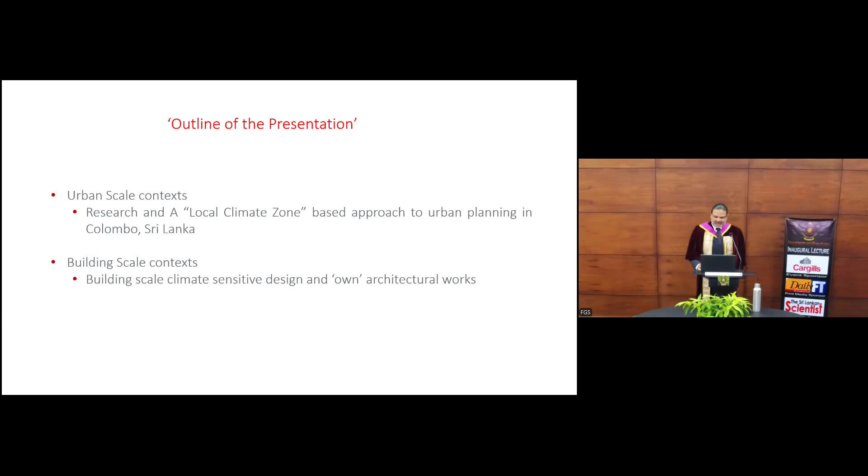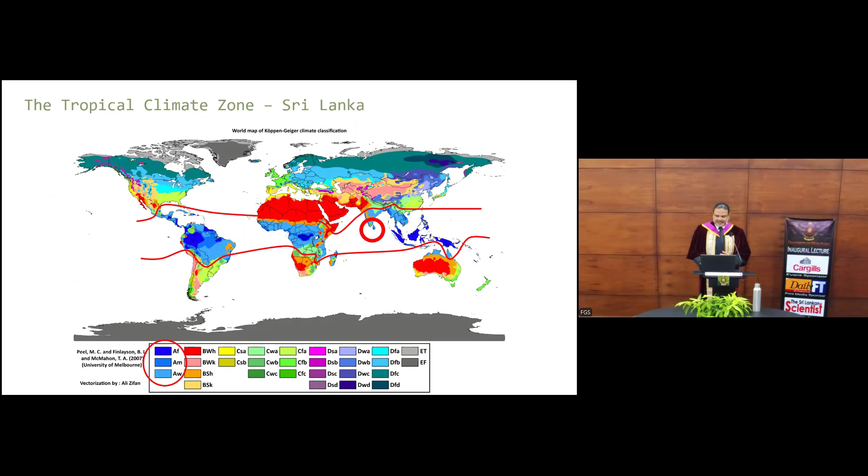Climatic context: we know that we are in the tropics, and Sri Lanka, very especially, is in a unique situation being almost on the equator. There are situations where the tropical climate we experience is varied throughout our country. This is both a challenge as well as an advantage.

We know that designing in the tropics, or living in the tropics, and therefore design for habitability, has many challenges, some of which are alluded to here. High humidity makes evaporative heat loss very difficult. It's a principal means of thermoregulation at higher temperatures, which allows us to be comfortable in this context.

Weak macro level winds: although most of design is based on natural ventilation in this area, at certain parts of the year we are devoid of it. We know that wind directions change, and also when the sun is directly overhead, we see periods of no wind, which makes design difficult.

Another thing is absence of annual variations. We almost don't feel any seasons as such—maybe rain and more rain—but having these aspects are challenges.

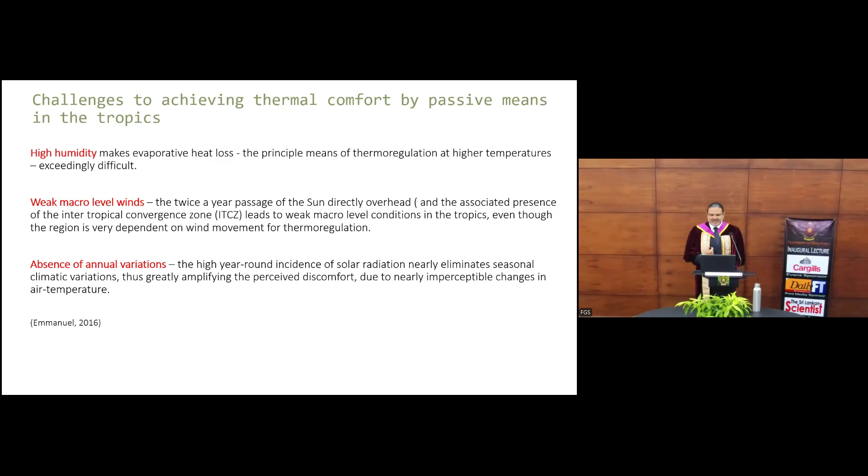Further, local and global challenges, especially in this context. Now we see things getting increasingly problematic, where extreme events are not readily known before they happen. Therefore, these consequences can be tragic.

One of the aspects we can pinpoint is the urban heat island effect, and this is where my studies as well as teaching focus on—urban heat island as a way to mitigate and adapt.

When we talk about achieving conducive environments for living in the urban outdoors, we look at trying to break from the vicious cycle where energy use puts back or exacerbates the system totally. So in decoupling conventional resource use and therefore waste, we can mitigate and adapt.

In this sense, we have to look at all contexts, from the urban scale right to the building scale. But on the urban scale, or context where people would build, has more importance in this area that I have taken on. Therefore, settlement planning is part of the major element that we focus on.

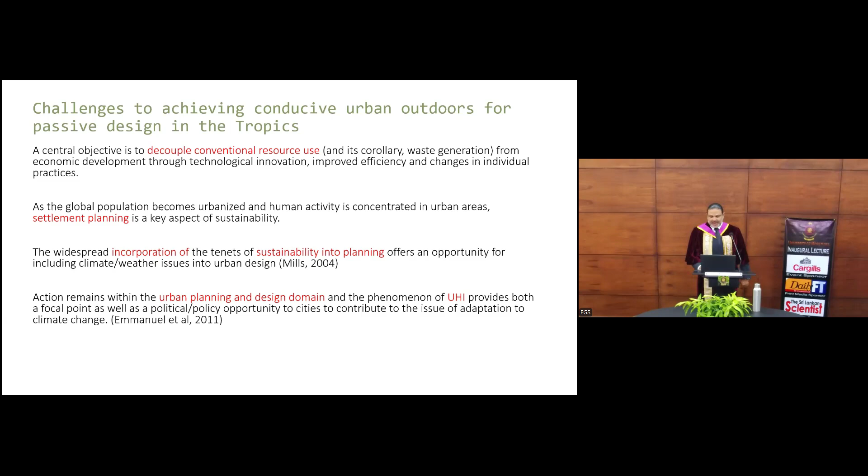The tenets of sustainability into planning is also a critical area that is forgotten most of the time. But here we focus and say that urban planning should be in the design domain, and the approaches to UHI mitigation is a major part of that—urban context.

As mentioned, there are several scales that we dwell upon in terms of design. When we talk about climate sensitive design, it can take on from the mesoscale right down to the micro scale. In my studies and in the applications that we take on, it is the micro scale that we are interested in—that is the scale that a practitioner, urban designer, or architect can focus upon.

Therefore, a three-dimensional space at the micro scale also allows us to design for natural light and ventilation, which is very much a part of our planning and building regulations.

In this purview, the local climate zone is a system that includes climate critical urban parameters. That is, not only do we talk about morphology or physical factors, but the idea that climate also should be built into it is an approach that could allow better application. It is this area that I will stress upon.

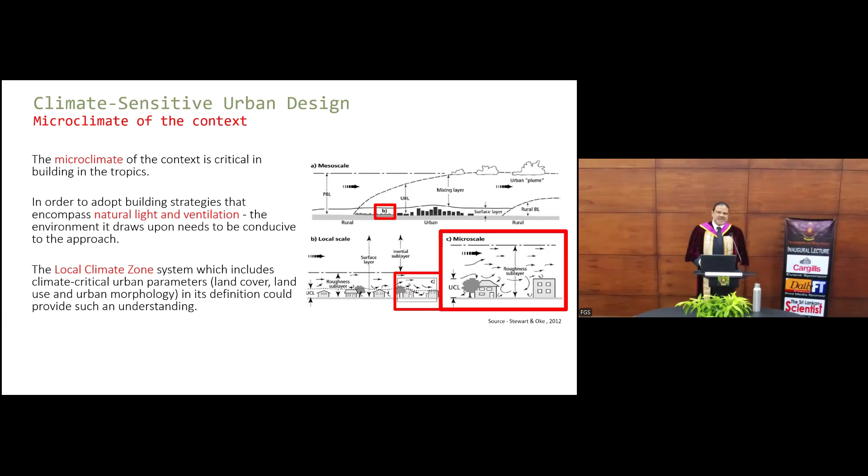So the local climate zone classification is a development that has really taken on since we started these studies almost a decade ago.

Urban heat island investigators saw several problems with the term urban heat island, where a simple definition of urban areas being warmer, or cooling slower, than rural areas was deemed too simplistic. Here, the idea is that the protocol should be more specific so that we can draw upon this.

So when we go into local climate zones, it means the areas that we occupy. We know in general areas, even though we are moving through a city, certain parts of a city feel different. You feel the difference in your local warming. But in definition, it was urban.

So this is where the local climate zone comes in. Local as in a region of uniform surface air temperature, which is 100 square meters to a square kilometer, a local zone, so that it can be taken on later, which we will discuss. Climate, so it's within a certain zone, we would experience a certain climate. The climate is a characteristic parameter that we would feel over a certain amount of time.

And then zones. So in zoning these areas and recognizing that each zone is different, we go away from the urban to rural difference and talk about the urban heat island intensity between certain zones. So this diagram on the right shows you these patterns that were developed. We know that when we are moving through a high density, high compact, high rise area to a more open, low rise zone, we feel different. So this is exactly where we pitch our application protocol.

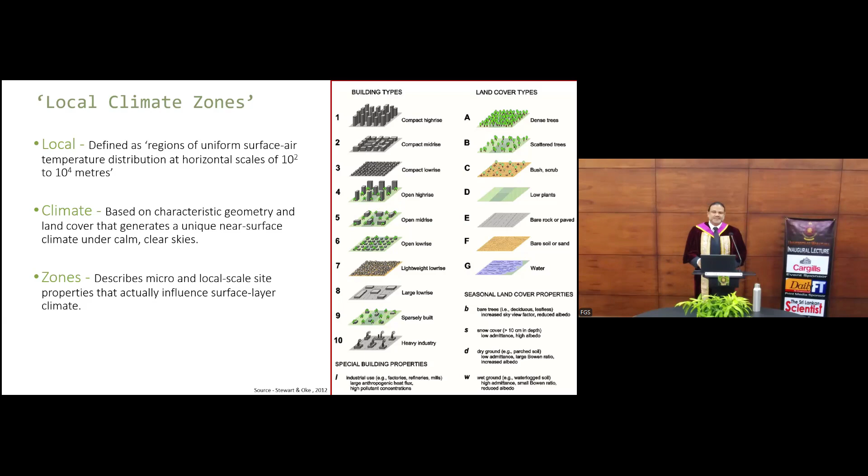To do this, we recognize that each zone will have its own inherent properties, zone properties. These properties will have physical, metabolic, as well as functions, materialistic functions that define this. We know all of these drive urban heat island.

Factors like sky view factor, how much sky we see. We know that the more sky we see during the day allows more solar radiation into the system and warms us. But at night, more sky view also allows radiation loss. So this is one example of a key factor that drives urban heat island, where incoming solar radiation during the day is trapped within our built forms and structures and cities, and doesn't cool as fast as a rural area.

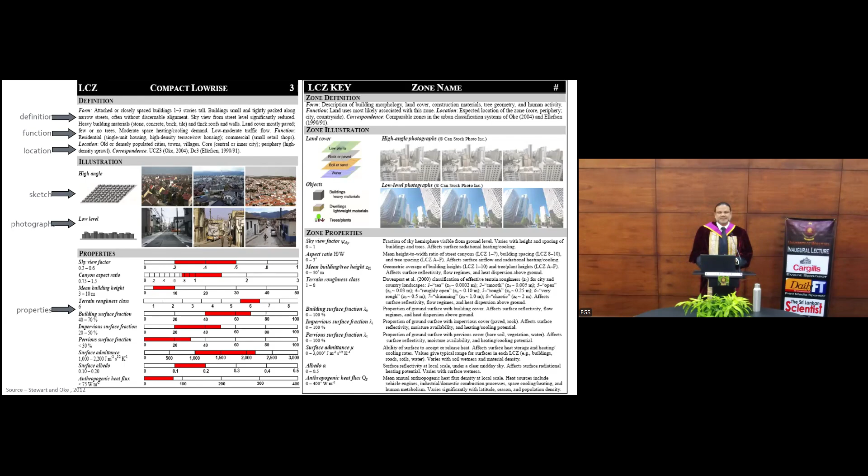City context. So to look at this, these factors, we took on Sri Lanka and Colombo as a focal point.

This is the most dense area in our country, Sri Lanka, and these images show you how this aspect — not only the whole world, but Sri Lanka itself — is warming. The first series of maps of Sri Lanka show you thermal comfort during the hottest months, and the bottom line shows the trend during the coldest months. In all of these diagrams, we see Colombo on the western coast as a typical area of warming, affected by urban heat island, therefore needing attention.

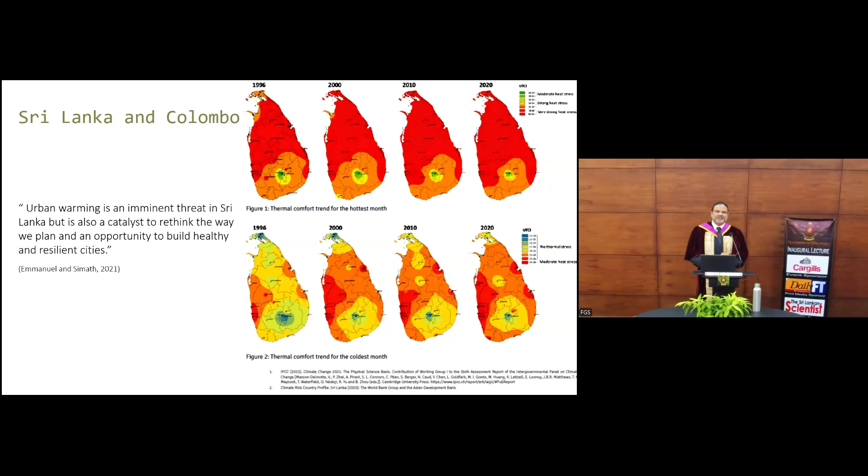So to do this, we look at classifying Colombo into local climate zones and then see how we can use these climate zones going forward. So we take the classification in three parts or three steps that were defined by its authors, Stewart and Oke, in 2012, and this study was done at the same time, parallel to that. So these are factors that we were able to exchange with them as well.

Stewart and Oke are geographers, so their idea of a local climate zone definition was to study or define and record local level warming. So the establishment of measurement sites and what we call metadata reporting — the parameters we saw earlier are those metadata that we would report. We would imagine if the context changed, then the warming properties also change. So this was the rationale.

For example, in Sri Lanka, our Colombo meteorological station is, we know well, at Bauddhaloka Mawatha, where it has been there for more than 100 years. But a couple of decades ago, part of its context completely changed. An example is the British High Commission coming in.

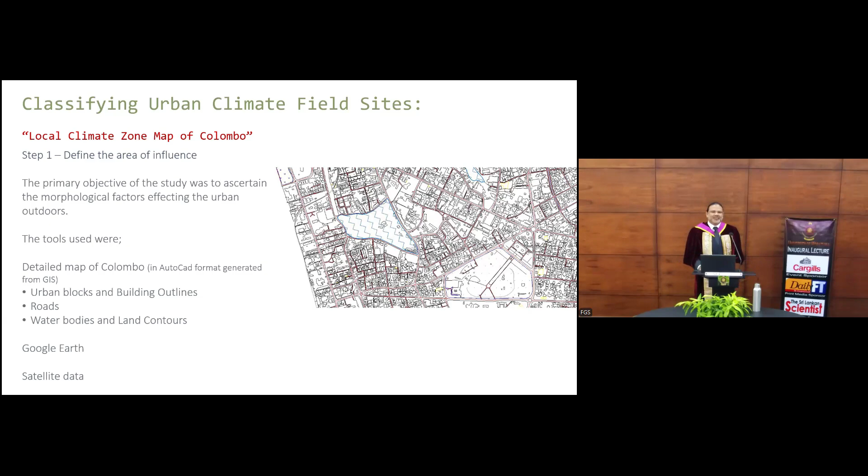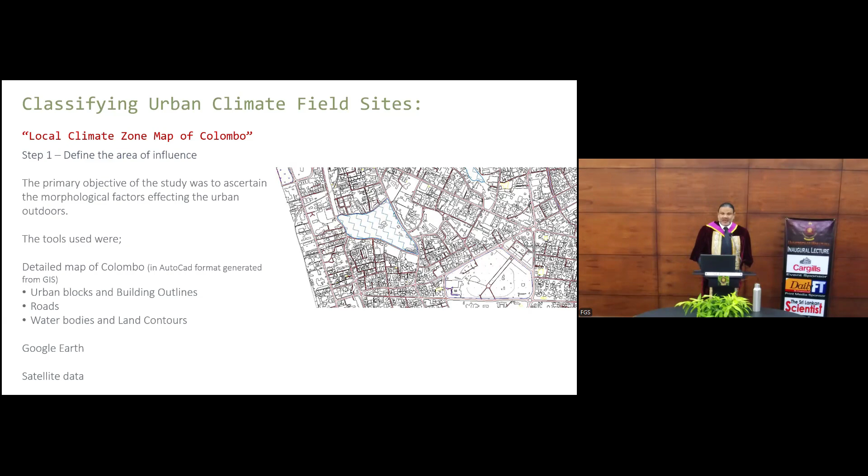Interestingly, after we presented this in similar forums, Stewart and Oke also changed or modified their approach, where they would go into these urban blocks as the primary way of defining an area of influence.

The next step is to collect metadata. This metadata talks about properties like sky view factor, height of roughness elements, surface cover factors, and also material aspects like thermal admittance, which will define a local climate zone.

Here we see some examples from Colombo. We also see areas that we can define as one local climate zone, but also areas of mixed use. The local climate zone doesn't look at the context from site to site, but a general area, so that it has characteristic properties rather than individual ones, which we cannot impact as easily as we would want.

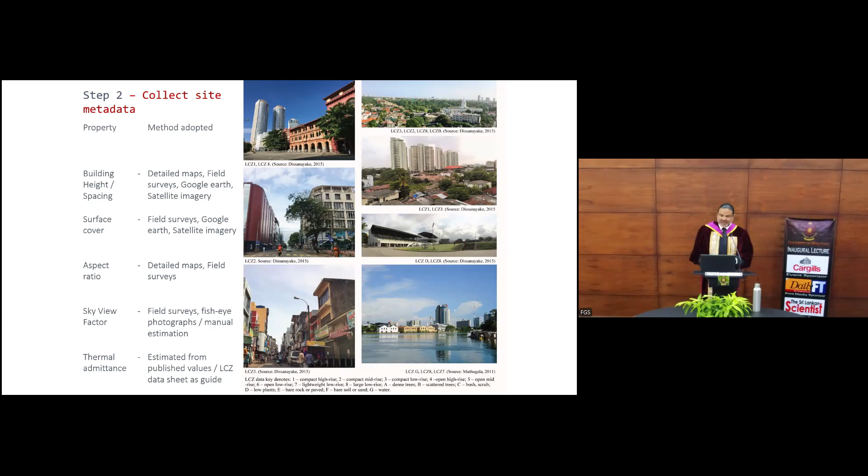So in recording the metadata, we would define or select local climate zones into 10 building type series or 7 land cover series. We also recognize seasonality of land cover properties, which can give you a finer aspect to it.

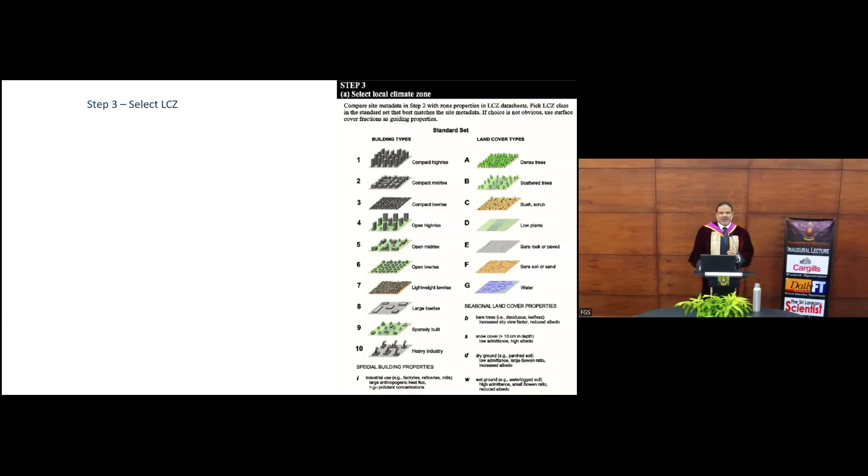Based on 2010 data, back in 2012, this is what a local climate zone map of Colombo looked like. But even though we present it on a 2-dimensional scale, we know this is a 3-dimensional morphological map of Colombo, where each of these zones will give you morphology - physical properties, height, width, spacing between buildings, etc.

It also shows critical areas that we can take on, looking at all these maps that have climatic as well as physical properties. So we know that certain areas can be more impacted.

According to 2010 data, most of Colombo was LCZ3, that is compact low-rise areas, and the compact high-rise areas that have increased since then are very few and far between.

So this gave us a situation where we can still see that Colombo is not that bad, and in identifying these areas, we can approach it.

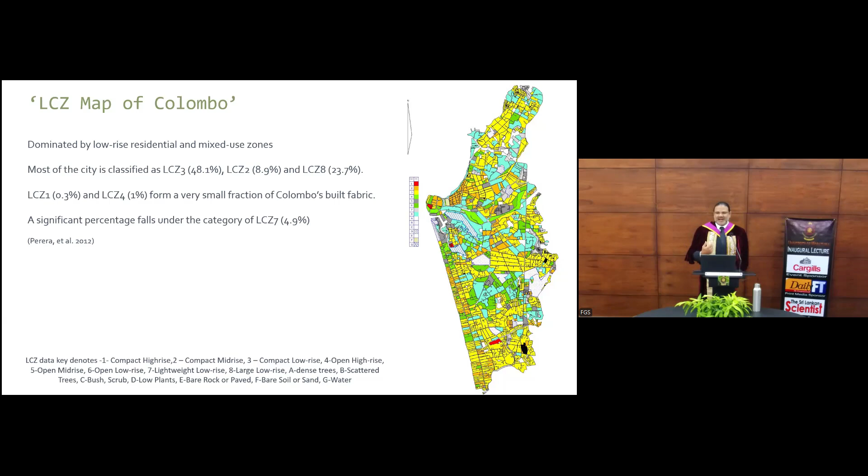This map also shows very definite areas of the city. The yellow zones are more compact, low-rise, affluent areas. Then we see compact mid-rise, especially on Marine Drive, where we see more residential and an influx of commercial coming in. North of Colombo is quite different, and so forth.

Knowing that an area is not uniform, the local climate zone classification system also allows you to sub-classify, where an influx or input of another pattern within the greater pattern is allowed. The main pattern, or what is more predominant, is given priority, while we still note what is joined with it, because these can have climatic impacts and warming impacts on the local level.

Imagine Colombo nowadays, where the compact low-rise, compact mid-rise areas along Marine Drive - I'll take that example again - where we have high-rise buildings just coming up in between this low-rise context. We would imagine a higher anthropogenic heat flux, higher AC use, more vehicles into that block, etc., pushing UHI.

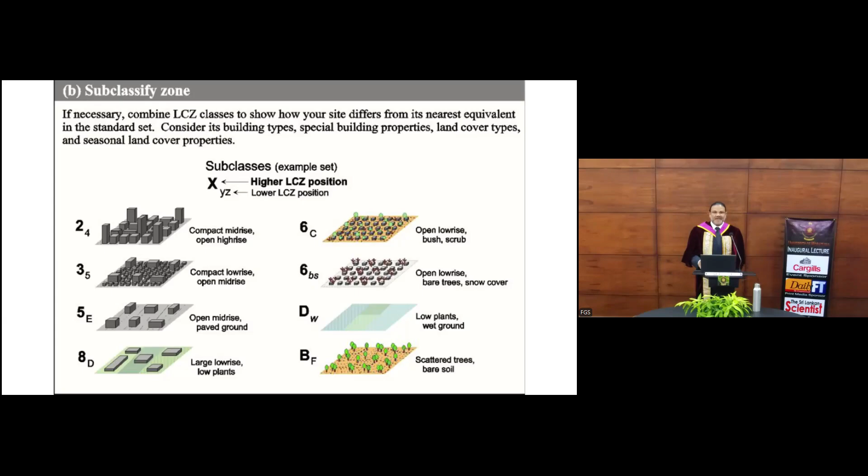So we went about subcategorizing or sub-classifying local climate zones for Colombo. When we looked at this, we saw that there were almost 42 patterns.

But when we presented this to Stewart and Oke in that forum, they were worried that this local climate zone definition was not really meant to be finely detailed, but to generalize areas better, where we can understand and simplify enough to compare zones.

So taking those comments into consideration, we looked to a more coarse subclassification or categorization, where local climate zones infused with building series we put into one category, and local climate zones subclassified with surface cover series we brought together. That gave us a much better picture that corresponds to what is on ground.

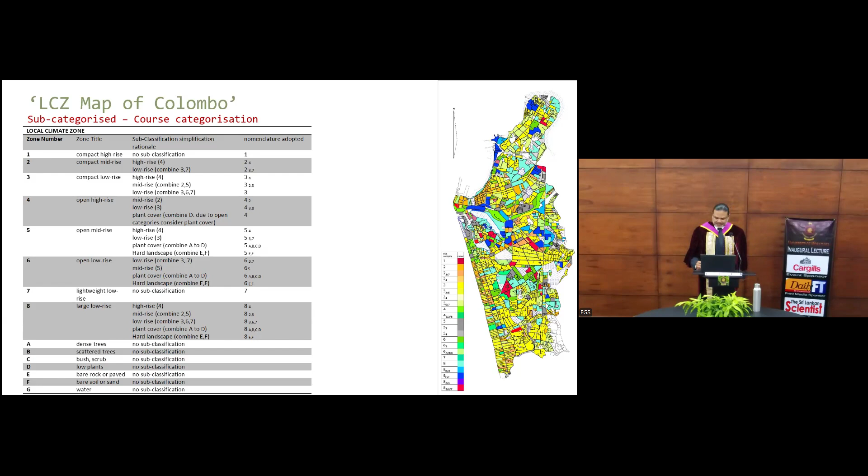Now we were talking about UHI. This mapping exercise was tested in this sense - we looked at the impact on urban heat island or local heat island effects. To do this, we used a numerical simulation called the surface heat island model, or SHIM, where we used the cooling of urban canyons, the rate at which urban canyons cool during nighttime. We know that urban heat island is a nighttime phenomenon, so we see the difference in cooling rates between these patterns, which is what is defined by urban heat island. Here we use this surface heat island model to see what is the urban heat island intensity and the difference between a control site and a particular local climate zone.

So this table shows us that the more compact, dense areas heavy with population and vehicle use are warmer, almost 4.4 degrees warmer than a control site, while the more open, less dense areas cool faster, as common sense tells us.

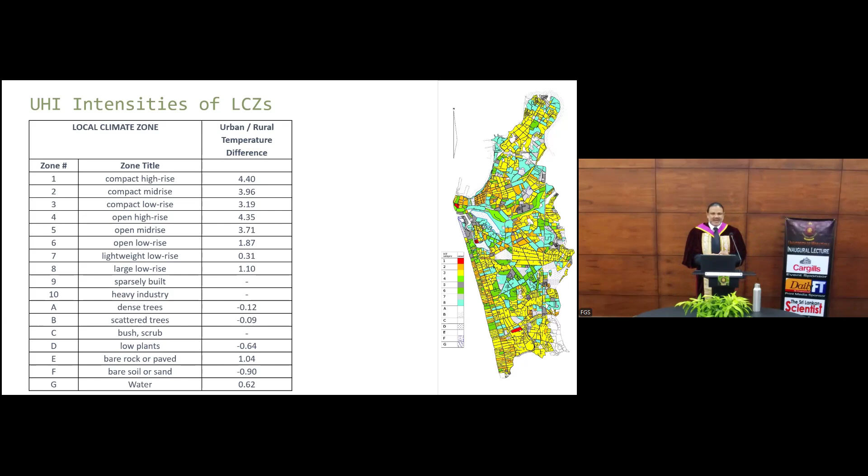Having mapped this, the local climate zone map for Colombo was the first time we looked at a map of Colombo in terms of morphology, physical properties, and climate. So how can we use this climate-based approach for application, especially for urban planning?

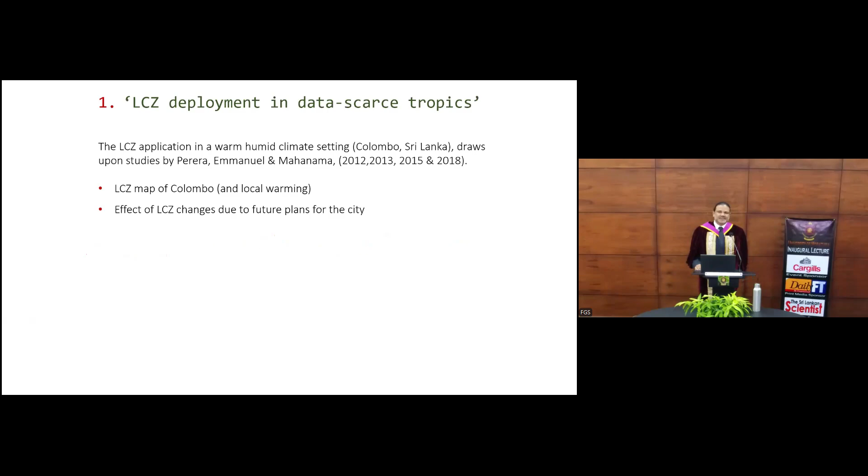We saw this is a simplification of the context, meaning we can deploy it rapidly, at faster rates than collecting intense, detailed data of an area. This system doesn't need that. The aim is to simplify and understand what an area of certain morphology will have on urban heat island - that is the main advantage.

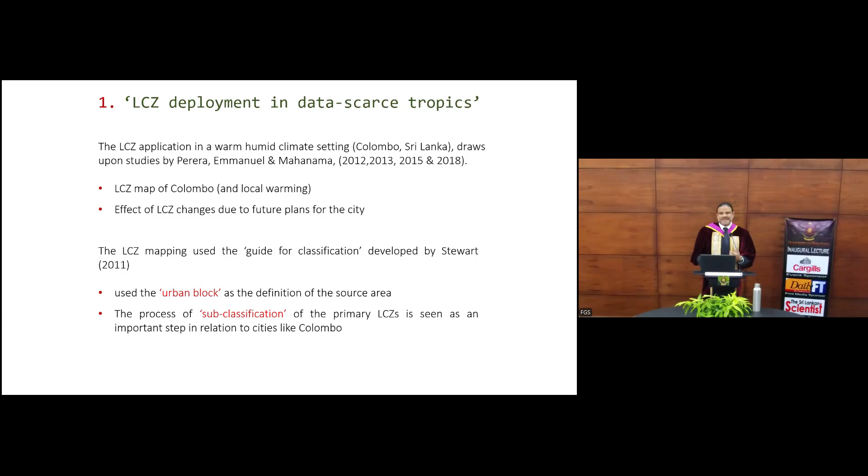As I mentioned earlier, we looked at urban blocks, which can easily be put into effect for changes when development is planned. What happens when one area turns from one LCZ to another, and what is the climatic impact? What is the change in morphology, and how does it impact people on the street?

In mapping and defining these areas, we know we have several design parameters. The question arises, when we go into a planning regime, what are the primary parameters we have to touch upon? We cannot look at everything, so what are the most important ones? Because we are talking about design and morphology, we concentrate on the geometric and surface cover parameters, leaving the metabolic factors aside for now.

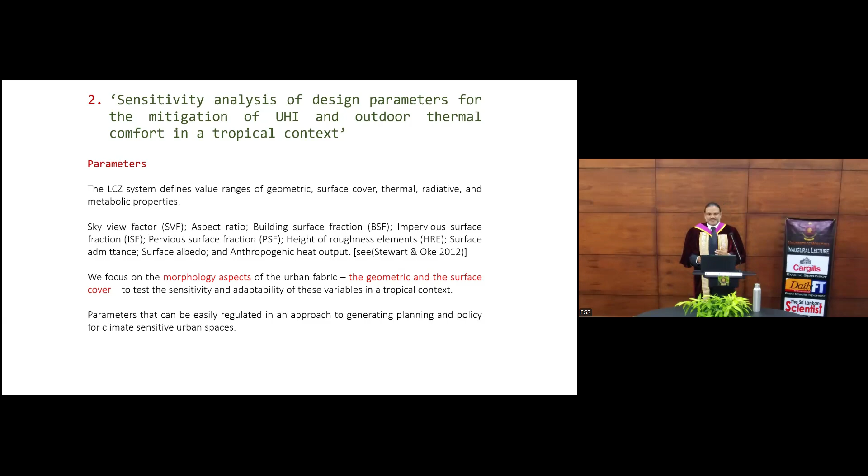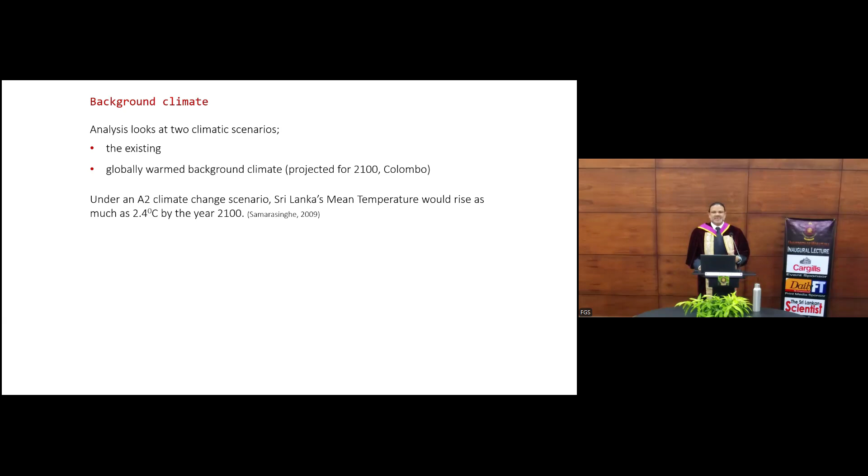We also looked at whether to consider the current present, or how these parameters can inform future decisions when we make plans for the future of the city - Colombo's planning approaches look toward 2030 and beyond. In our studies we looked at the impact now, and the impact around 2100, where studies say the whole world will warm, with global temperatures increasing by 2 degrees or more. So we pitched our studies from the present as well as the future.

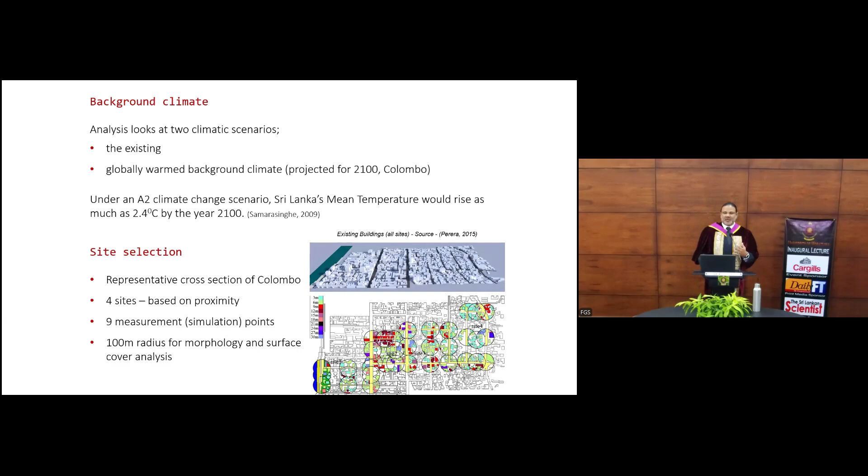We also looked at Colombo specifically. To do this, we approached it through simulation, pinpointing certain areas of a typical urban area in Colombo and looking at morphology changes on these particular parameters. We used a simulated matrix of almost 96 models where known urban design approaches were applied.

We know shading is a major part of our urban heat island mitigation approaches, so we asked how do we shade the streets - which streets do we shade and which do we leave be? All those morphological aspects were applied into these models - buildings of the same height, taller buildings on the street edge, or taller buildings at the center of the block, etc. Common sense tells us shading, according to context, will drive the cooling aspects in different ways, and for each we recorded these parameters.

The idea was to go into statistical approaches to see which parameters have better intensity or better applicability to mitigation - that was the way we went.

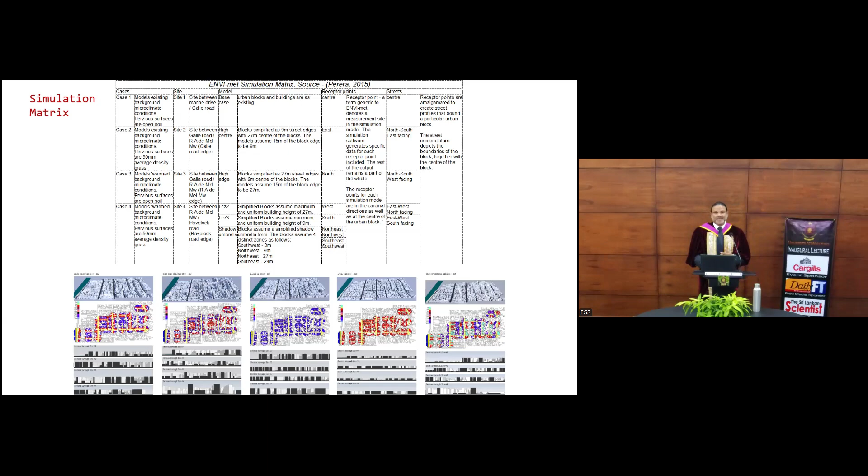So ultimately, we saw that when we compare mean radiant temperature as the main aspect of thermal comfort or thermal impacts on the street level, we looked at the impact of geometric and surface cover variables on how it impacts mean radiant temperature.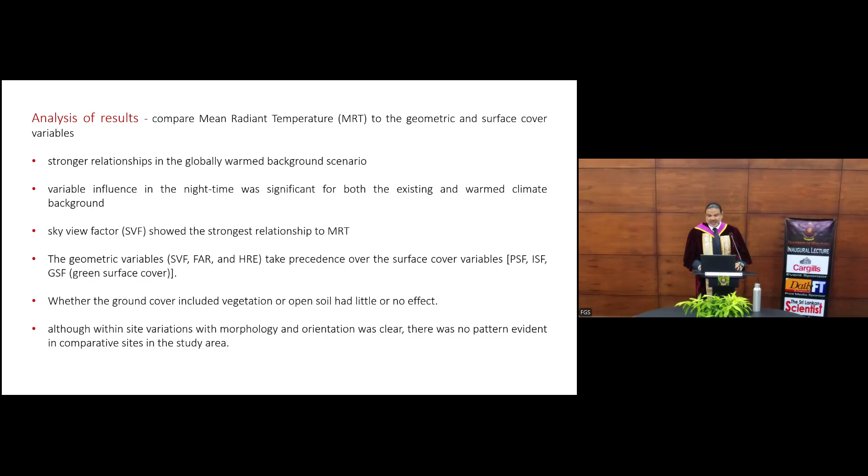So within that, also when we look at local climate zones, orientation and morphology was also evident. The impact of various orientation and morphology was evident.

So with this in hand, we went on to the next step of looking at a local climate zone based approach to urban planning in Colombo. How can we apply this? How does it apply to Colombo? What can we look forward to in that sense?

So as mentioned, urban morphology, both geometric and surface cover properties, can be applied into a mapping protocol. This mapping protocol then brings back opportunities for climate sensitive as well as context specific urban planning.

So zoning plans for the city right now use more activity based zoning rather than physical — so more physical rather than climatic. Here with the local climate zone, we will bring all those parameters into the system.

And so whatever it is, cities are to be habited by people. So therefore, it is not only the form of the city or the way it looks or is used or developed, but also how people will use or be comfortable at the street level. So therefore, the importance of climate aspects goes without saying.

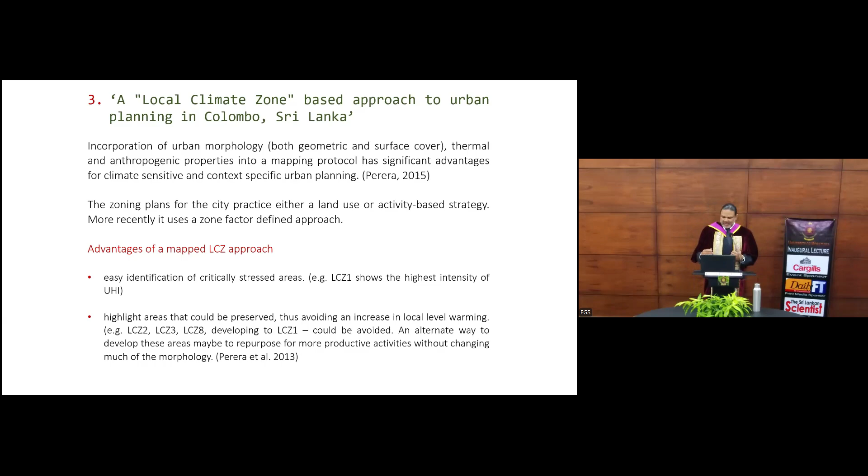We saw value ranges in our definition or the data sheets that we show. So there is a value range, and we can use those ranges to our advantage. For example, height of roughness features go from a certain height to another. So it's a simplification of the area — it's not specific.

Also, the idea of sub-classification allows for areas — so a highly dense area that is interspersed with open areas to allow mitigation.

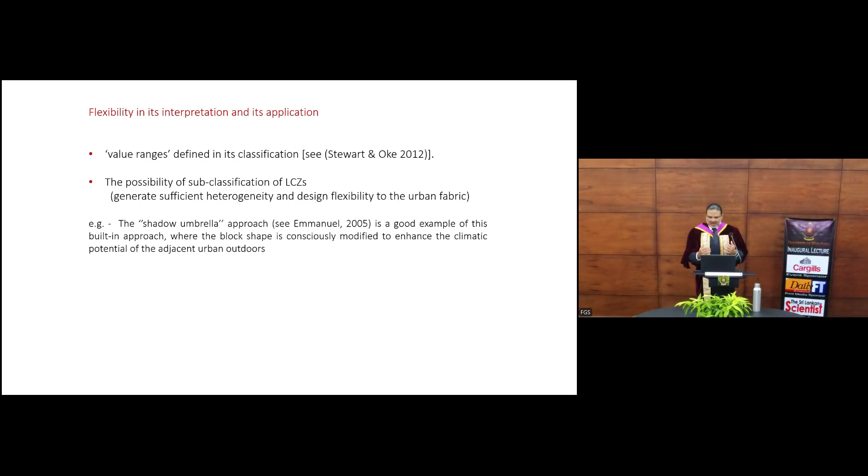A good example of it is the shadow umbrella approach, developed by Rohinton Emmanuel, where the city itself or the block itself shades its own buildings, shading others for the greater good of the urban block, rather than plot by plot as we look at now.

So what are the implications for planning?

So simplification of the context allows generality and applicability across similar contexts and climates. Then by knowing the sensitivity of morphology variables like SVF as the primary element, we can look to control now and in the future as well.

Our UDA city development plans take it on in terms of these areas: the larger context, zoning plans or planning regulations, density regulations in a next scale, building regulations in terms of individual plots, and also these development guide plans where they look at a certain area and apply specifically. So we can use this structure as well.

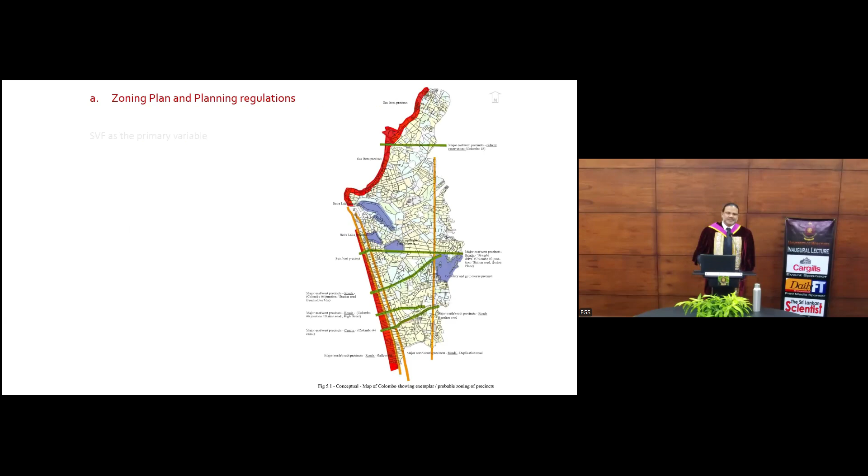Where zoning plans, we identify parts of the city that we need to control morphology. And then in this scenario, we can have the sky view factor as a primary variable.

Now we use a term called zone factor, and with a zone factor, a floor area ratio, where it is all based on density and how we build on a particular site. But here we take it to another level. We look at it in precincts or in local climate zones, how a local climate zone shapes itself, and also interacts with the next climate zone next to it.

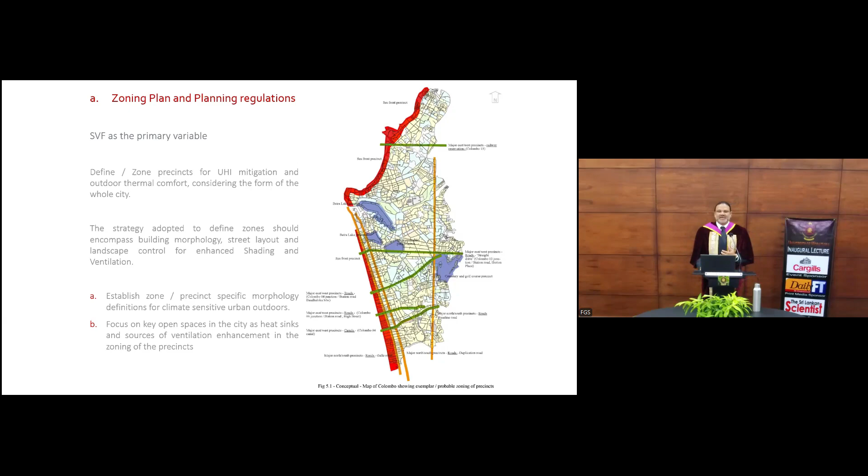So these are advantages. In Colombo, we have areas that we can easily exploit. The patterns that were developed from these looked at density regulations.

So we know that a local climate zone is a simplification of this. In knowing the local climate zone, immediately we have a situation where density is defined: height of roughness features, packing of roughness features that talks about spacing between blocks, not only for vegetation etc., but also for wind flow.

And so in looking at that, we can look at a larger picture, and we know we can define a maximum development that will not affect or impact the future. For example, Hong Kong has something called air ventilation assessment, where the ventilation of the total city is the focus rather than single blocks. So when we build on our own blocks, they know how it impacts the greater context.

But here we can come back the other way around. We can define the property of the larger block and then look at how people are allowed to develop. This has other problems - it raises questions how urban planners will incorporate this, and then how do they handle social and economic needs and factors.

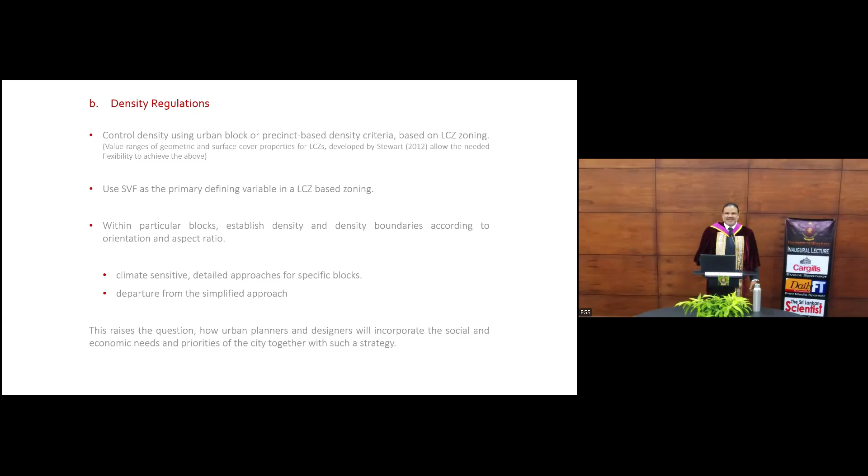So as mentioned before, the building regulations will take a more zone-wise aspect, and we can use SVF as the primary parameter rather than block or plot-wise. So we know Form C of old. Form C has changed into different things in our urban UDA planning regulations. So we would see not Form C for a certain plot, but Form C for an urban block or an LCZ precinct.

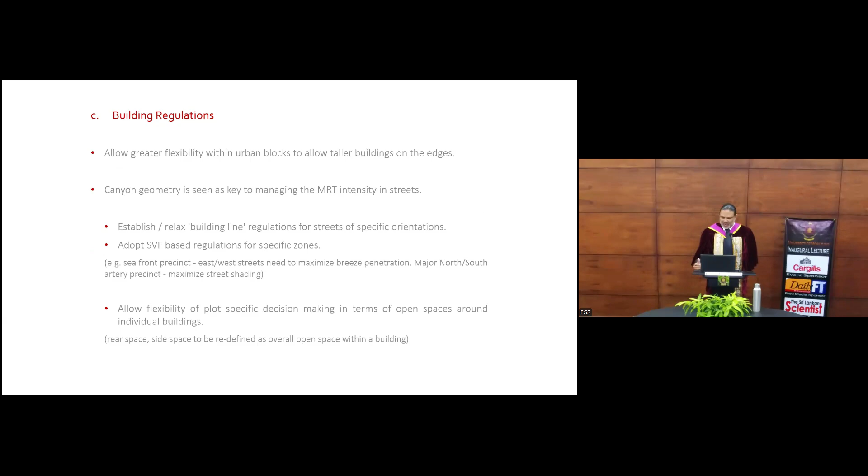So it gives greater flexibility. People who want to build more, so you can take on different aspects of it. Difficult, yes, but then different contexts - precincts, say a seafront precinct will be very different to a more inland one. And then development guide plans, as we see, will have very definite areas. So this goes well with the current structure that the UDA uses.

So this study, mapping local climate zones to understand and drive urban heat island mitigation, we saw advantages and ways forward to apply these things. Especially in a data scarce context, where we can look at context and then apply rapidly, where a developing country like us needs quick decisions - but these quick decisions cannot be arbitrary. It has to be very much based on informed decisions. This allows us to inform our decisions in a rapid manner without waiting for years to collect data and look for answers.

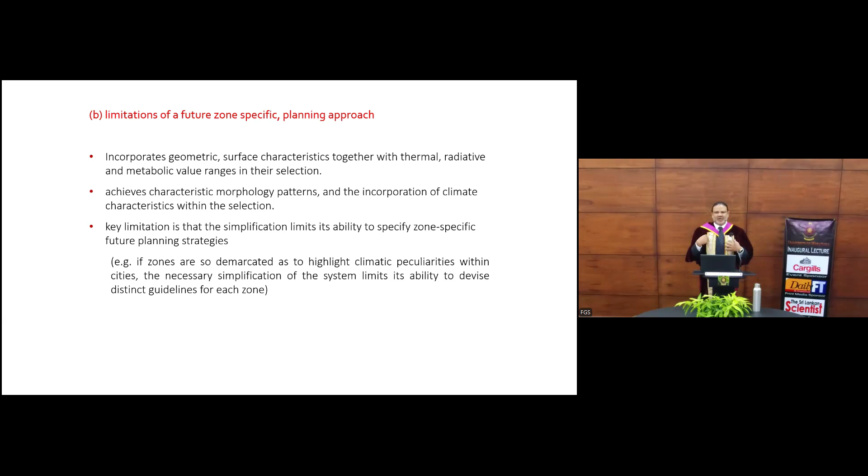However, some caveats are in order. We can see problems with this system as well, where simplification of a climate context can have aspects where we oversimplify, and therefore some things can be missed. You can also see limitations of a future zone-specific planning approach. Local climate zones were not meant to be planning zones, but a way to understand the context. Therefore, we cannot use them directly. But in doing so, having this system in place, we immediately have a situation where we set our base in terms of geometric surface cover, thermal, radiative, and metabolic value ranges. Therefore, we can work within that - not only with the morphology, but also in terms of amount of people in a space, what are the materials that we use, what are the colors of the context, etc.

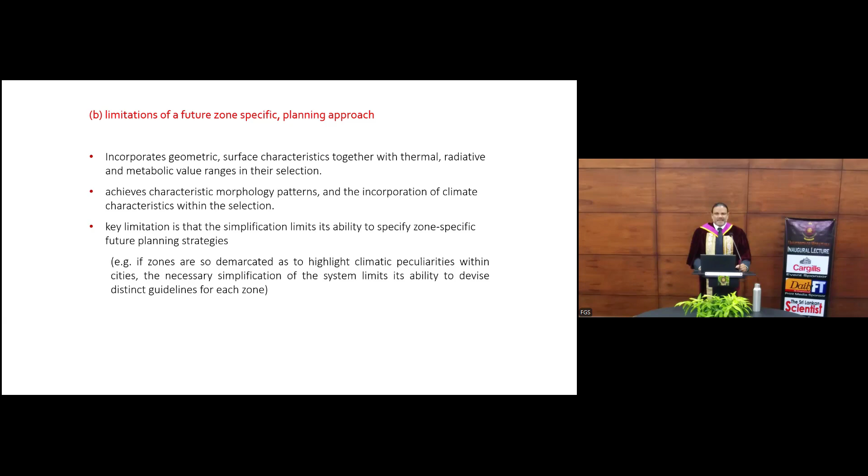Interpretation into value ranges in an LCZ base is also problematic, where it is not meant to do so. The classification cannot be a plan in itself; it is a step to inform planning.

Sub-classification also has problems, where our data sheets and parameter ranges are defined for the main local climate zones. These are not defined for sub-classification, so that's a problem as well.

In conclusion, the need for context-specific knowledge from several tropical cities in this data-scarce yet rapidly developing region is emphasized. This knowledge will only enrich both the process of classification and sub-classification, thus enhancing its usefulness.

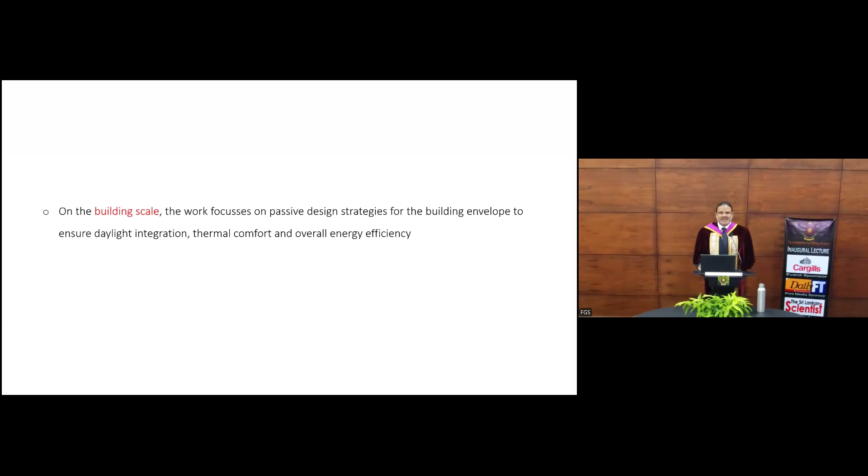In the second part of my presentation, I will take on the building scale, which is also very important in our studies, and the area that I have taught for a long time.

Building scale looks at passive design strategies, as we looked at climate-sensitive passive design strategies for an urban context. Here we know that the building scale will impact the city scale or the urban scale, and vice versa. It is recognized that buildings are a major driver of urban heat island effects, so the little part we do here will also impact the greater context, and vice versa.

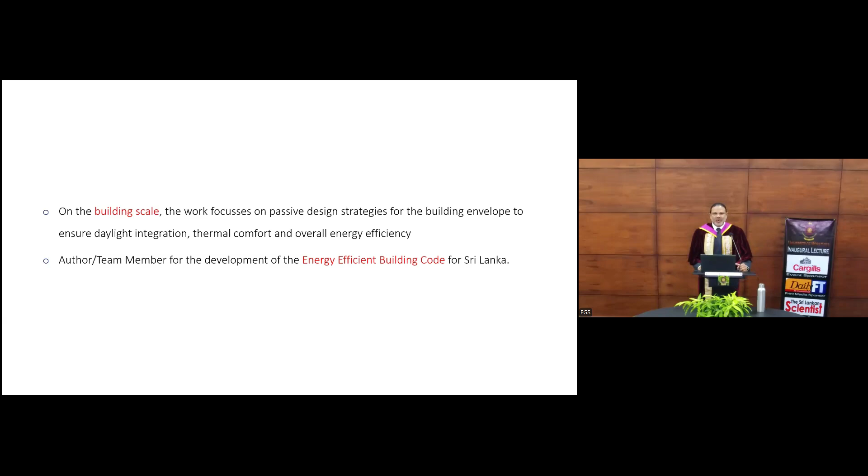I was also fortunate to be part of developing the energy efficient building code for Sri Lanka, which looks to be mandatory in the near future, where energy efficient buildings have to go through a certain regime to comply. The critical factor in all of this is the building envelope, the building that will hold habitable spaces where people occupy.

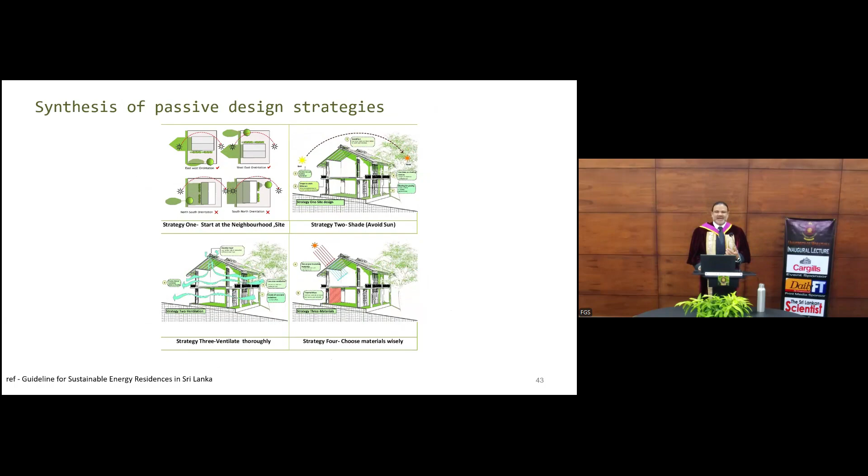We start at the neighborhood or context level, where at the urban scale we must have a microclimate conducive for natural light and ventilation. Otherwise it is useless—if the microclimate outside is bad, bringing natural light and ventilation inside just brings the bad conditions in too. So the outside should be conducive to allow the inside to be better. That's why we start at neighborhood level.

The second strategy talks about shading. In our context close to the equator, the sun is high in the sky, so most of the time sunlight comes directly on us. But the advantage of the sun being high is that we can shade and cut it off, unlike in the southern and northern hemispheres where the sun is low in the sky, so shading devices really don't work there.

This shows several patterns, starting from the site itself, certain strategies we use to cool the building envelope and interiors. We can shade using external features, we can shade using building features—how we shape the envelope, how we create shading devices inside and outside, so that most of the radiation impacting the building envelope is cut off.

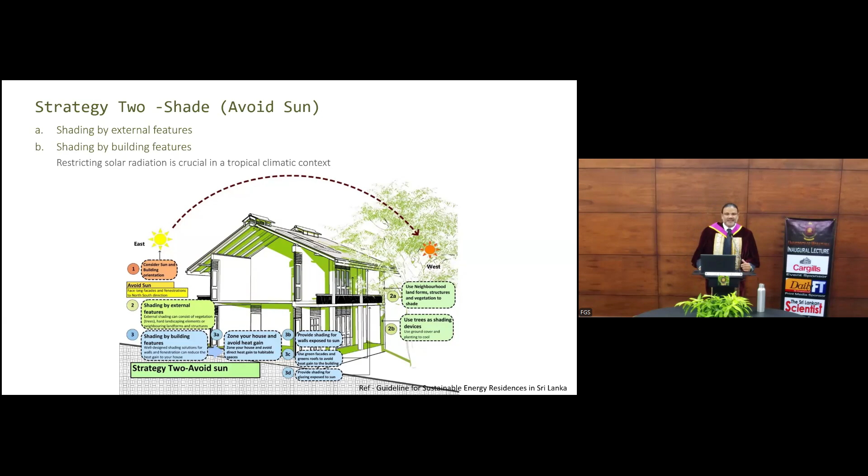Similarly important is ventilation—how do we shape our building to catch maximum breeze? How do we use fenestration, inlets, outlets, sizing, and spacing so we can create cross ventilation and stack ventilation that takes out the radiation that has come into the space? How do we use ventilation together with evaporative cooling?

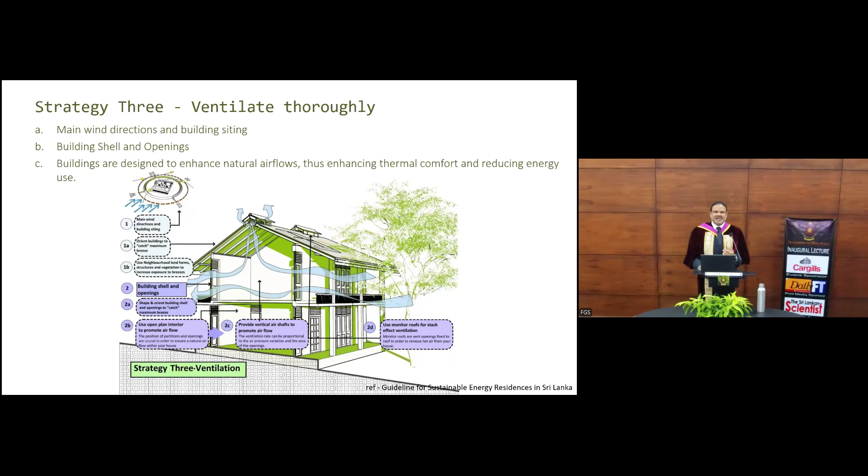We are planting on the building skin—planted surfaces outside will bring cooler air into the interiors. And lastly, how do we choose materials wisely? What materials would we use to reflect, delay, and keep out radiation totally? How do we use colors, insulation, etc.?

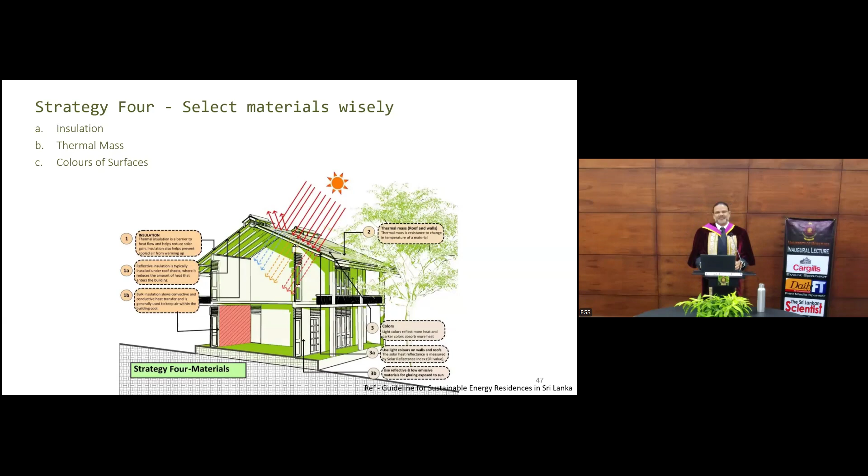Materials matter not only in terms of energy use at this level, but also at the source, where we can talk about embodied energy, etc. To quickly explain these factors, I will show some of my own work.

In responding to this, we looked at it as a space that looks inside. Here we have several layers or zones that allow or filter the internal spaces. Each habitable space is open to two open areas that we bring in, and it is not borrowing from the street, but within the site itself. The zoning within the site creates, at different times of the day, warmer areas and cooler areas.

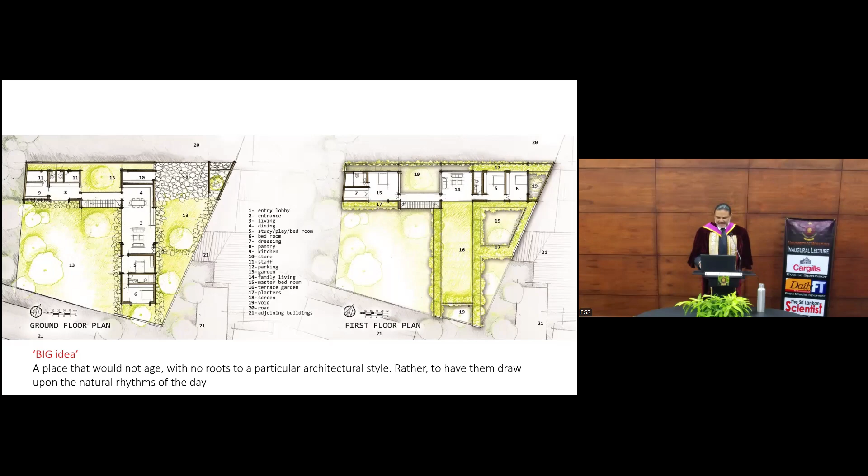Because of that, we can easily encourage natural ventilation through the system. We also see several envelopes where spaces are insulated from the outside, not only in terms of accessibility but also natural and shaded areas. The left-hand side is the lower level, and the right-hand side is the upper level, where the north-south facing habitable spaces take on that same aspect—so what does it do for the architecture of the space?

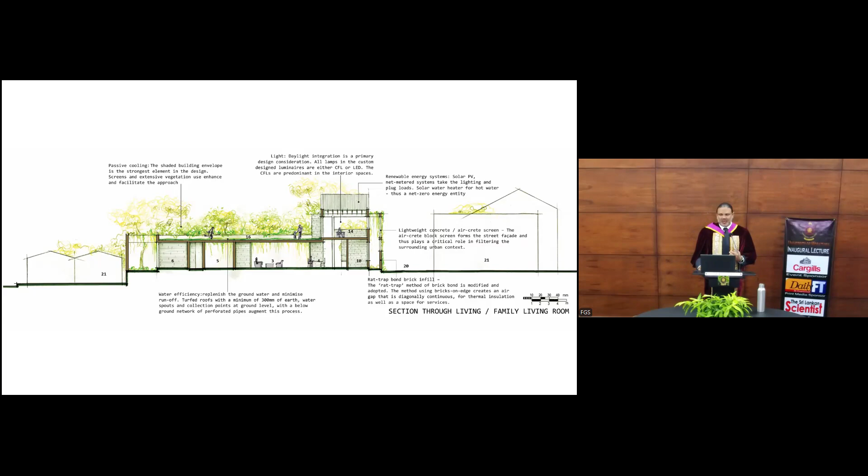Both these examples I show you today are net zero buildings, so we generate our own energy as well.

The first layer here is the street edge. To the person outside, it's a solid element, so it becomes a filter not only for people on the street, but also for the elements coming through this screen. Though it is solid on the outside, when you are inside, it is a translucent, transparent corridor.

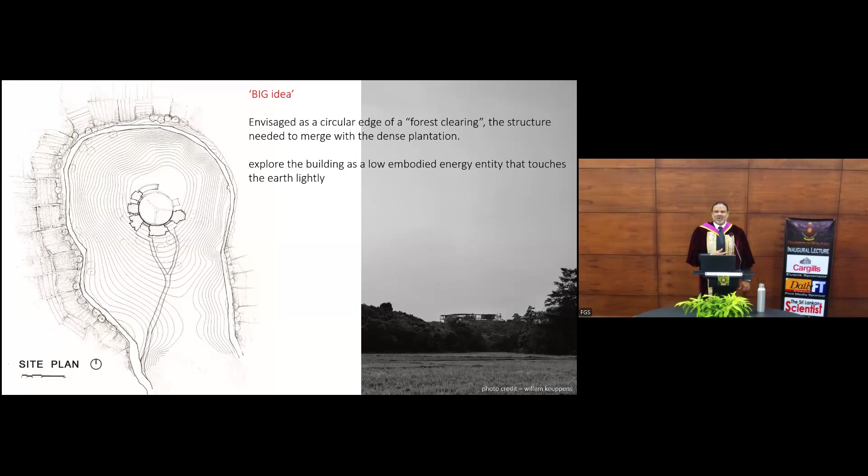Because this is a rural site, the way we build here is also important. We looked at a very low embodied energy material palette - a building that sits on the earth very lightly, almost skeletal, and at the end, hopefully the plants will take over.

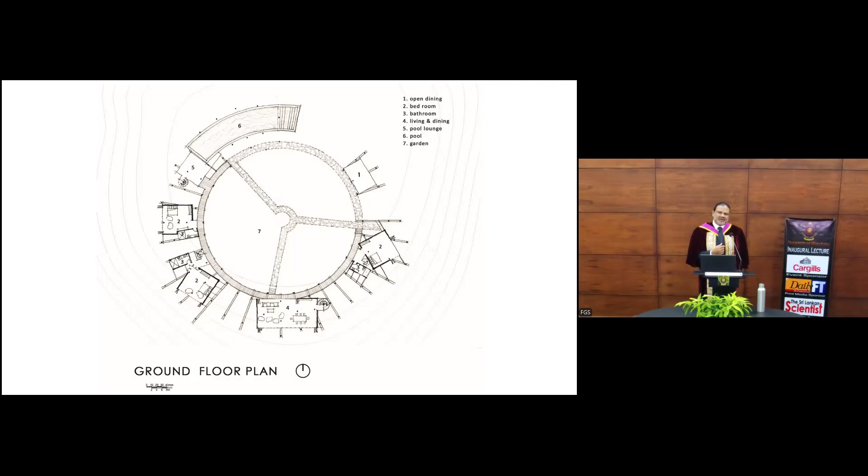Also in terms of form making, though we had a radial form, we wanted to break this, where the context itself drives where people look towards. The context itself looks to where we place certain elements. And then also because of the sun's movement and the wind patterns, these also govern this.

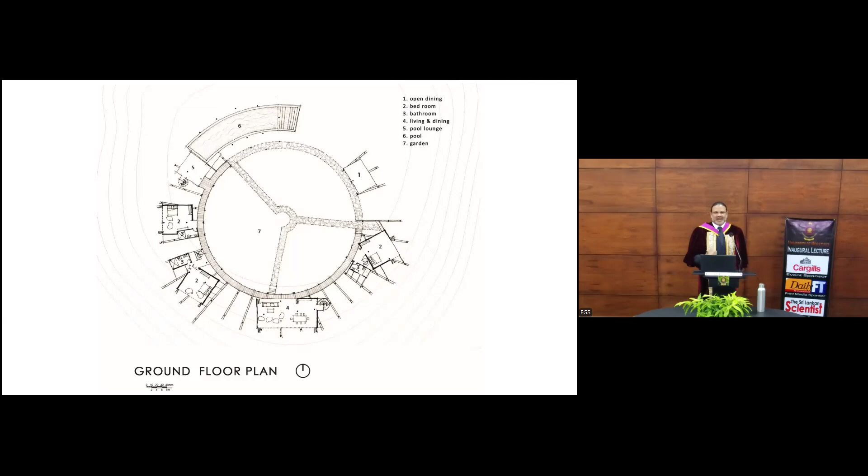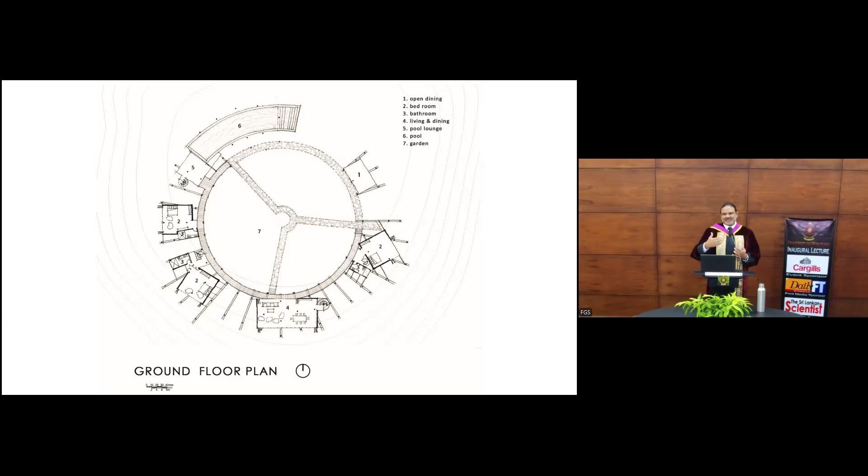We give priority to the main areas with this. The idea of this radial structure, we break it or juxtapose these living spaces so they are not symmetric, so it becomes part of the forest itself. Remember, it's part of the forest clearing, so the living areas are part of this forest or vegetated area.

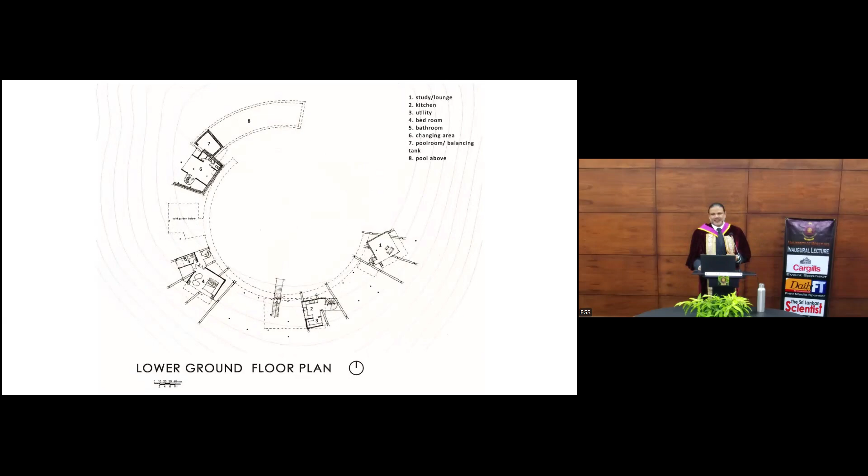So the layering of this building, or placing of the building on the hillock, also allowed us to tuck in certain places underneath, move into the forest itself. We are here, the top plateau is above the tree lines. These will go into the tree lines and allow the different microclimate to take its advantage.

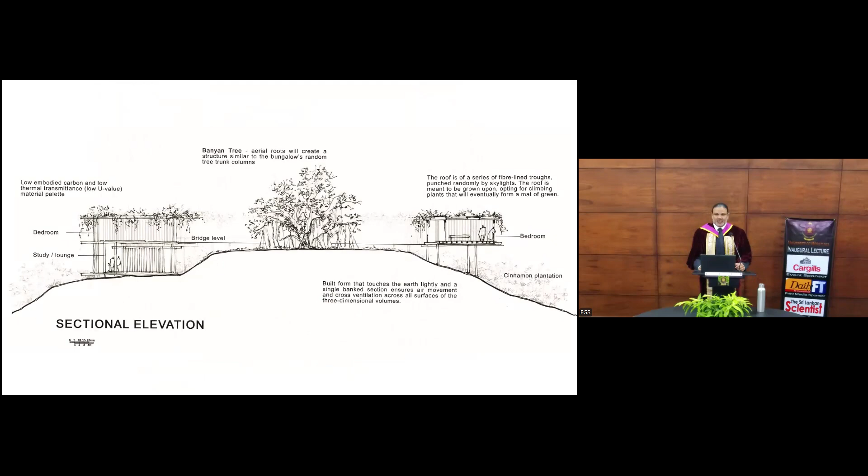So this is an image of that, where going off the plateau level or bridge level is one level, and then you would imagine all of this part to be part of the landscape itself, so that we can look out onto the vistas. So it looks like this in terms of placement. You can see the plateau level or bridge level and the other spaces cascading down the hill together with the plantation.

To the bridge is the connection. Everything else, once you enter the spaces within the bridge, you are free to experience the natural elements, the natural landscape.